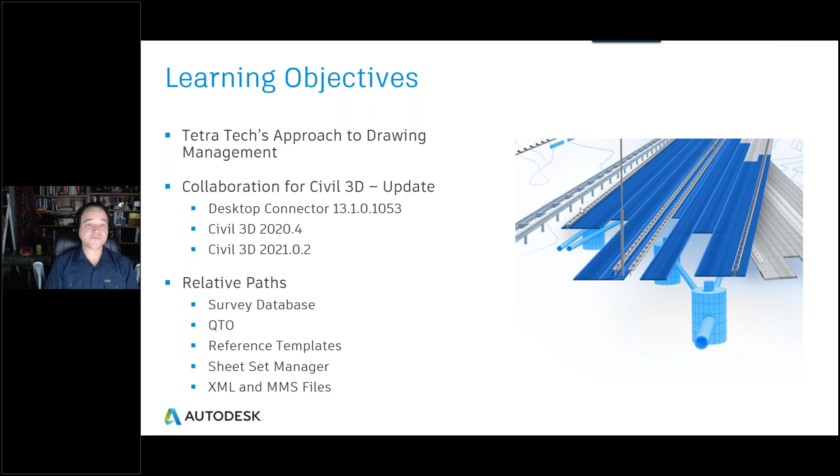What Brian's going to go into detail on are some of the workflow challenges we still currently have in BIM 360, related to relative paths. The components inside Civil 3D that are impacted are your survey database, your QTO quantity takeoff tools, reference templates, sheet set manager, and externally referenced files for surfaces such as XML and MMS files.

I'll let you go ahead, Brian, and talk about your workflow. Thank you, Sean. With our workflow, we were trying to figure out a good way to migrate existing projects going forward into BIM 360.

The first thing I wanted to talk about is the 256 character cap limit. What we've got here is a project under project folders with some basic folder structures, and we're trying to keep them as small as possible because of that 256 cap.

So the first thing we did was upload all of our files up into the server, and from there we wanted to mimic the original folder structure as much as we could, but we did it through the drag and drop method using File Explorer. If we go to the next slide.

By using File Explorer, as you can see here, we navigated to BIM 360, which is going to be under This PC. We started drilling down, and from here it looks like it's on our hard drive. And in a sense, it is.

So what you're going to do is dive down into it, and that actually refreshes your computer, and your computer now sees it, because you're going to be using a batch file. For those who don't remember what a batch file is, it's an old DOS programming method that uses a substitute command where you can make folders on your hard drive look like a lettered path. So what you're seeing here is that batch file.

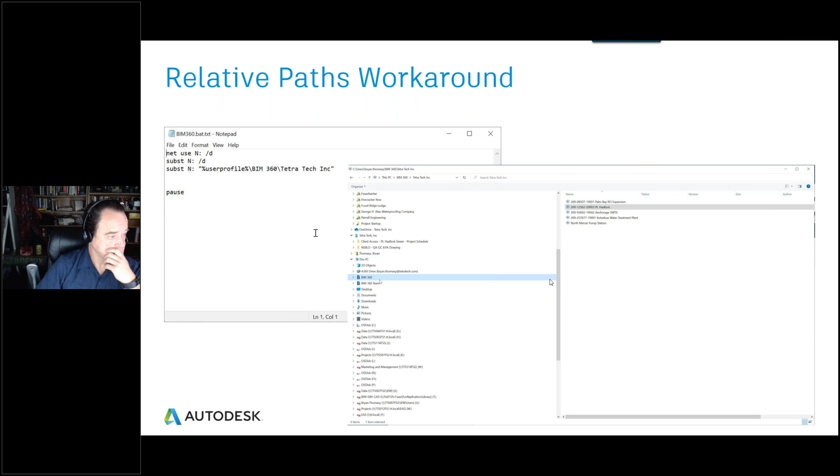On the BIM 360 folder you're wanting to utilize, in this case I've got Port Hadlock, you dive down into the folder structure where your files are located, right-click on them, and sync them for 2021. If you're on 2020, it's basically download. What it'll do is take them off the cloud and bring them down to your hard drive. This is important for the batch file to work properly, because if you haven't done that first, the batch file won't work right and won't see all the folders. So they've got to be cached locally to your hard drive first.

Once you've done that, you keep going forward a couple more segments, then you can launch your reference manager. You can navigate, and you see here my N drive, now it's calling it the operating OS disk N, and now I can dig down in and see the files. That includes Excel spreadsheets, DST files, drawing files, whatever is located in BIM 360 is now located here as well.

This is where I can open up my reference manager, drag the files over, and start setting them to the relative path. You'll notice that in the GBS 22 by 34 horizontal, our title block, it's already set to a relative path of the dot, but before it was basically set to the N drive. So you reset these guys to your relative paths, then just save the changes. You can actually watch it work in the background with your desktop connector as it's updating BIM 360.

Now, I do want to say, when you bring in the drawing, if you've ever used Reference Manager before, it's going to ask you two questions: do you only want to do the first level, or do you want to go down into the nested XREFs?

Only do the first level, it just saves you time. Also try to work backwards - work with your model files first, then work with your files that you XREF into the sheets. Those were the ones you want to work. And don't do them a ton at a time, just do them in batches.

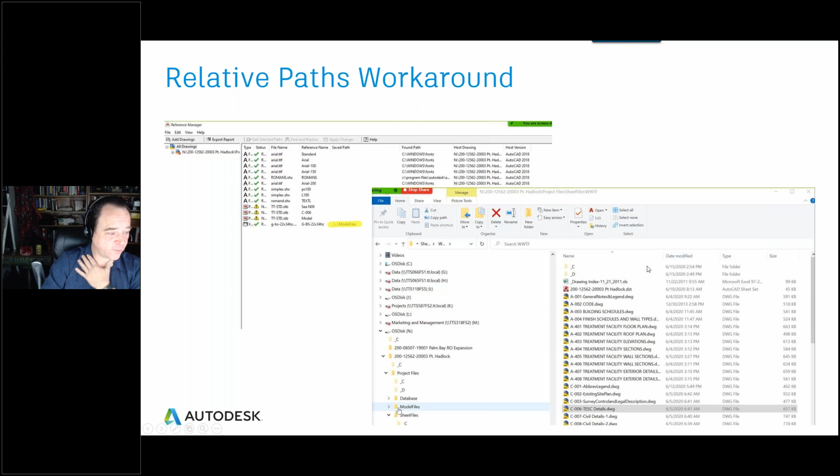So that's basically it. And sorry, Brian, we talked about this being probably one of the most important things. Yep, that is the most important thing. Thank you for reminding me.

Patience, patience, patience. Remember, you are downloading and uploading a lot of data, so just be patient with it. Some of them may take longer than others, but make sure you're in a position where you can set aside a little bit of time and do this.

Pre-cache, then change, and be patient. Have the desktop application open so you can see what's pending and what's moving forward through it. Once you do this - I took a 256-page plan set with over 500 files.

Through everything, it took me 36 hours, but that's after doing it four times. By the time I got it down, it took 6 to 8 hours, and the whole thing's readjusted, and now it's COVID-19 proof - we can all work from home, and it's a beautiful, beautiful thing. So patience.

Thank you, that's about all Brian. I have. Mm-hmm. That was absolutely awesome. We really appreciate that. My pleasure. Anytime. Excellent - does anyone have any questions for Brian?

Okay, we have one question coming in. The mail link does not open in one system. What do we do?

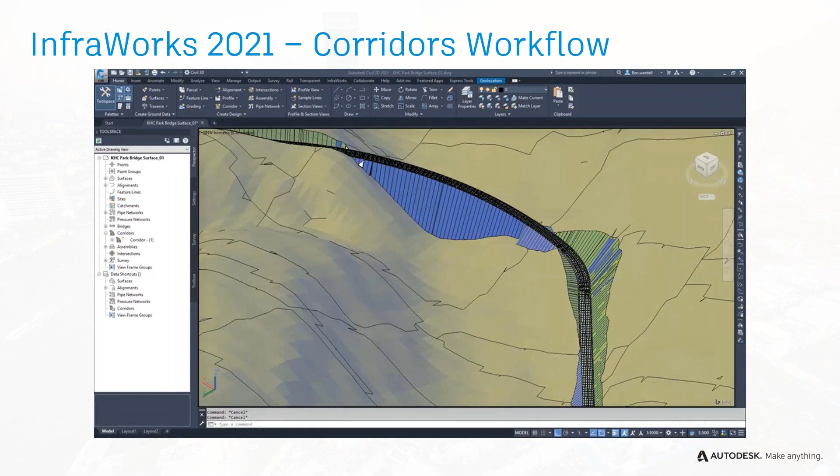Let me dive right into that. InfraWorks 2021 now utilizes the power and precision of Civil 3D for corridor models. Once the user has developed the geometric design details and created the corridor model, they can import their corridor directly into InfraWorks. Here you see the Civil 3D drawing—when I go into InfraWorks, I can import them directly.

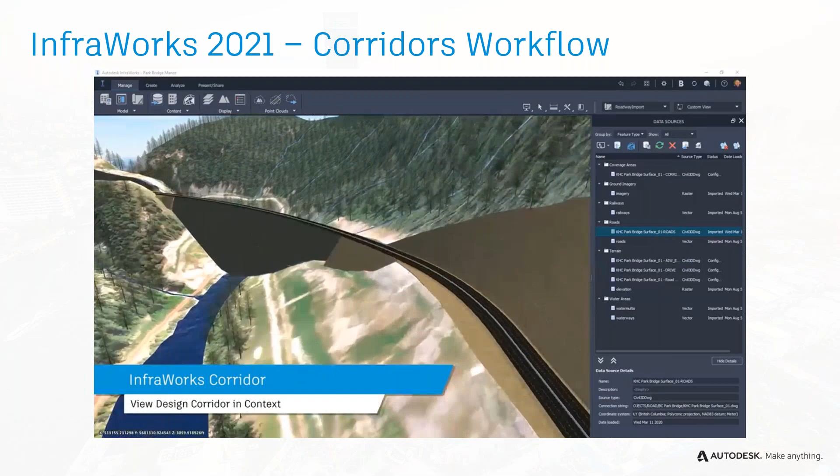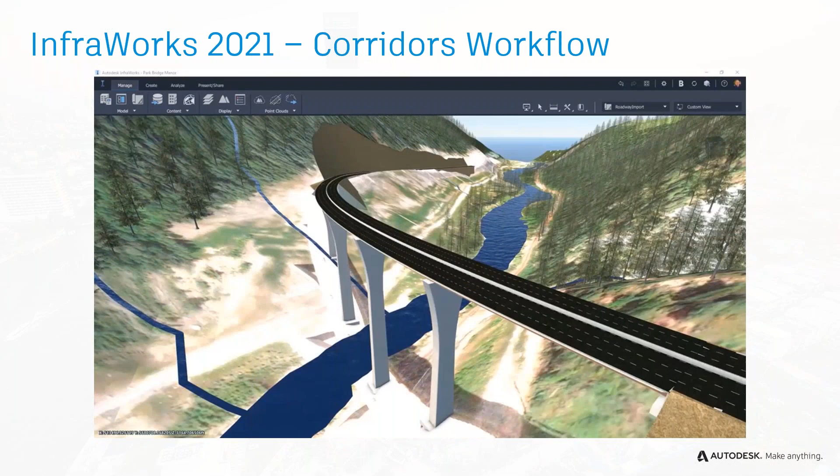When you do that, there are options that give the user control over how they import alignments with corridors from Civil 3D. This improvement allows users to import all the calculated design elements or just the selected elements—you can pick what you want. Users can even define the mapping of materials to apply to the corridor shapes, everything. Once you do that, the fully designed roadway corridor is placed in the contextual environment. From there, you can build your bridge workflow, tunnel workflow, anything using the detailed design geometry. The corridor model in InfraWorks is read-only, but it's linked to Civil 3D in a connected workflow.

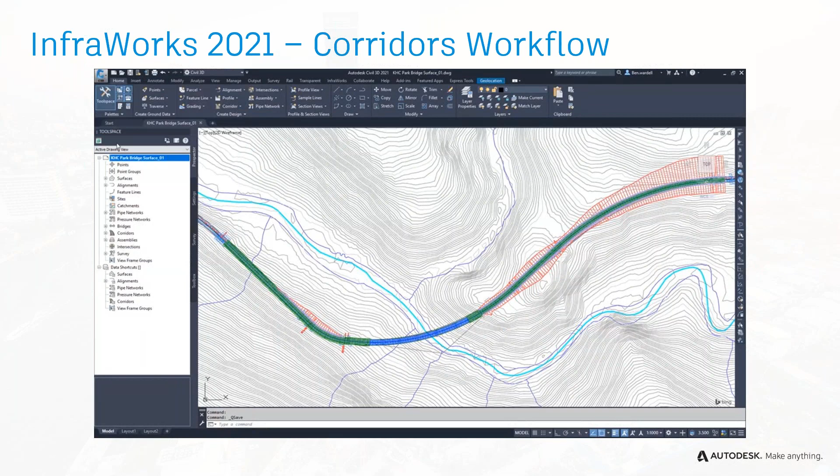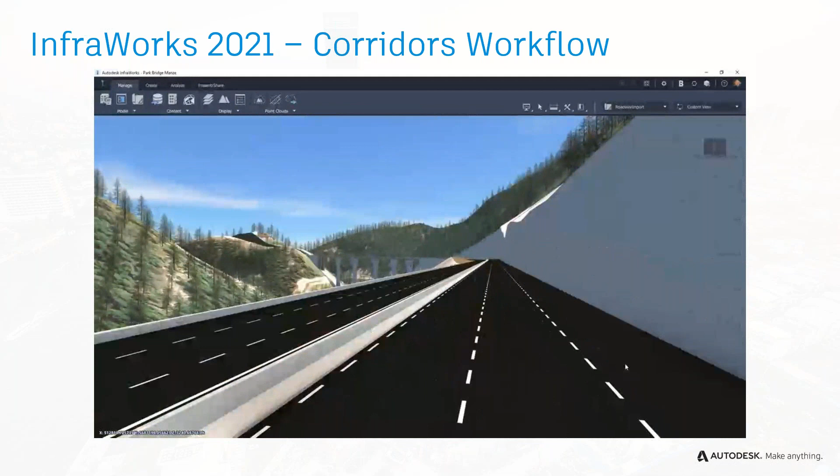So let's say revisions are made to the corridor model, either you change the alignment, the profile, or assembly-related modifications. Users can simply rebuild the corridor, save the changes, and easily update those changes in the connected InfraWorks model. All you have to do is click the data source and choose the re-import option. It's kind of like a cool refresh, but works on the DWG file and gets the detailed design aspect. This capability gives good control and helps enhance the workflow connection between Civil 3D and the corridors.

This feature is available from 2021. We are making some modifications that will come up in a future release also, but this is currently available for users to use. And the civil structures workflow is kind of a continuation of that.

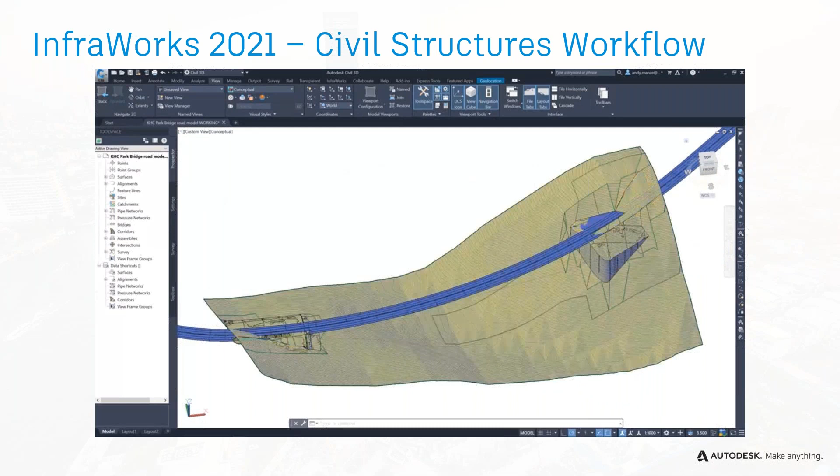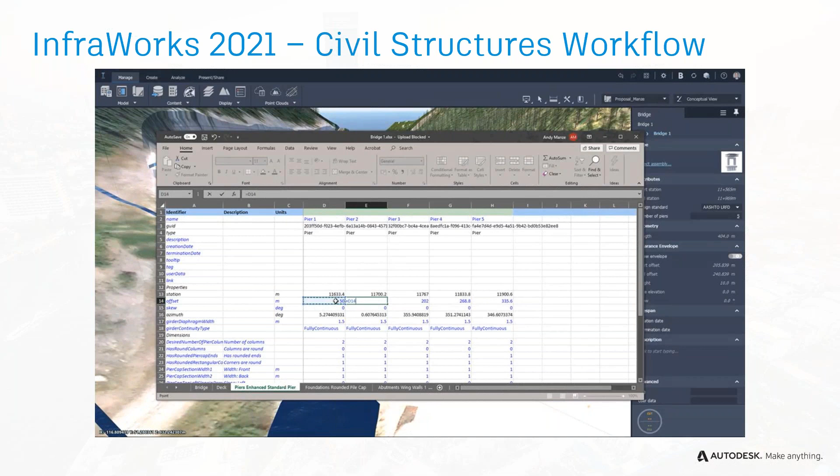In 2021, Autodesk released the enhanced bridge design workflow for bridge professionals. We start in Civil 3D, utilizing the road geometry to create the initial bridge. Then InfraWorks creates the bridge along the alignment using built-in heuristic rules. We can then interact directly with the bridge structure, changing individual components using the parametric toolset, for repetitive tasks or where geometry may depend on a formula.

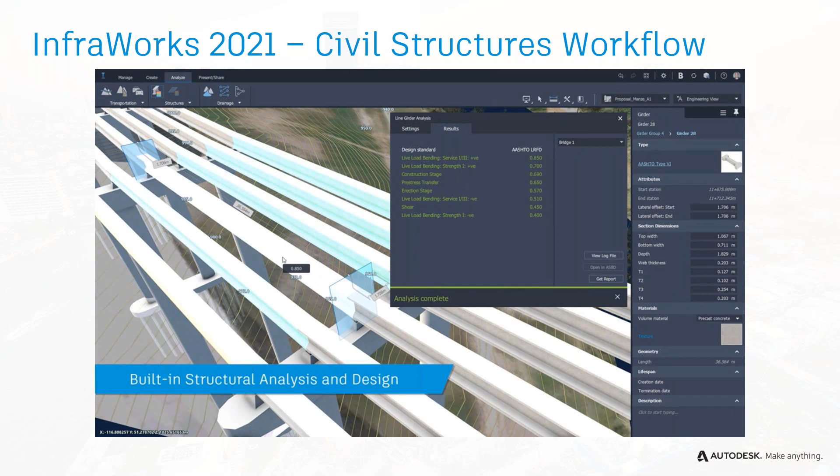You can even use a spreadsheet, which can be generated, edited, and used to update the model, making it more flexible and fluent. During the optioneering phase, it's possible to utilize the integrated analysis and design tools. This provides feedback to the user to identify workable solutions in an easy-to-understand format, and it also has detailed calculations and everything.

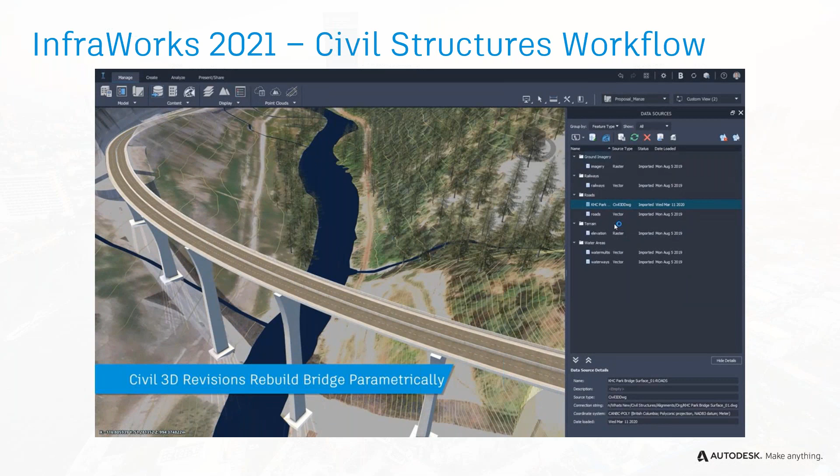When changes are made in Civil 3D, same as before, these can be accommodated by refreshing the Civil 3D data source within InfraWorks. The bridge structure will in turn automatically rebuild parametrically.

The bridge structure can be published to Revit also at any time with a new transfer process, giving additional flexibility in the use of customized Revit templates. Category mapping is a cool feature, providing reports based on mapped category bridge parts. So you can see how detailed it can go with inter-product communication.

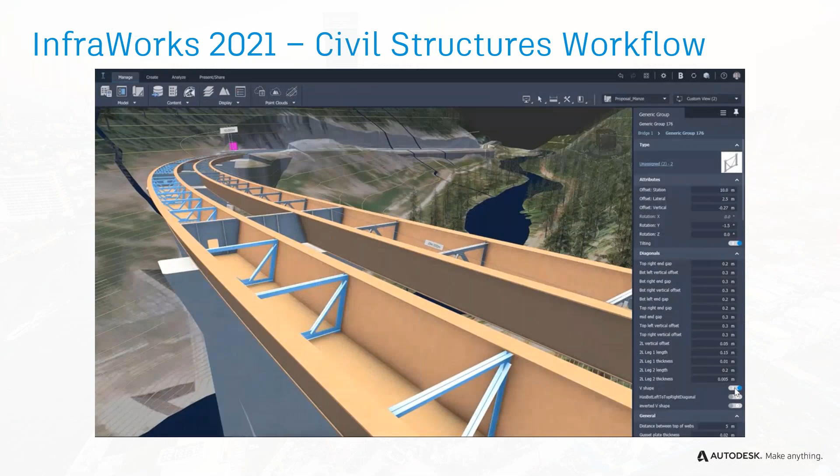Work in Revit can continue concurrently with the bridge modeling in InfraWorks, carrying out detailed tasks such as rebar, detailing, and sheet sets, everything. And it's also now possible to bring the bridge model back into Civil 3D to assist with the grading.

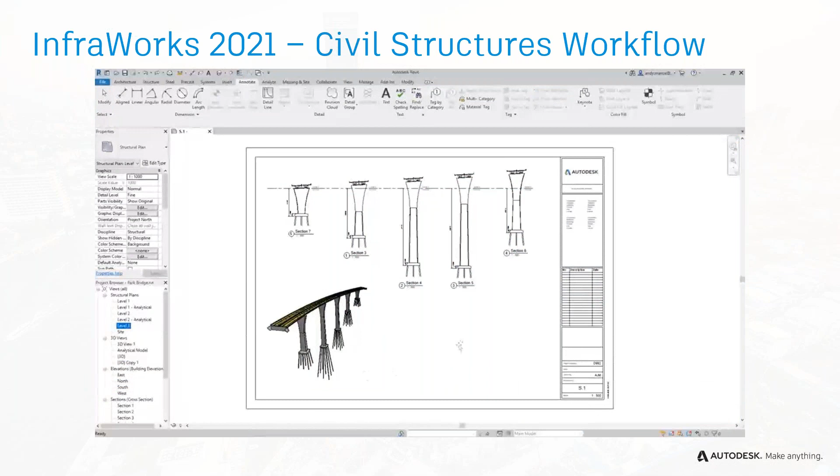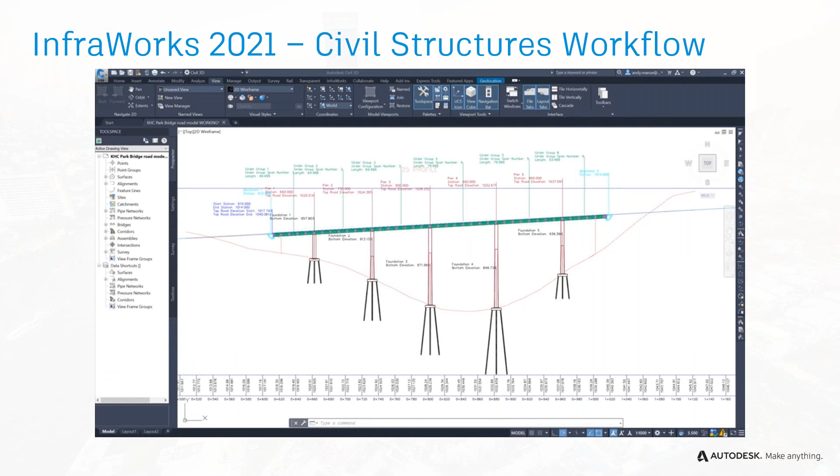I'll wait here—you're talking about the sheets and the Revit piece of it. And once you have it, you can bring it into Civil 3D to assist the grading task and create further documentation needed. And when changes are made to the bridge model, it's really cool—they can be reflected in Civil 3D by refreshing the data set.

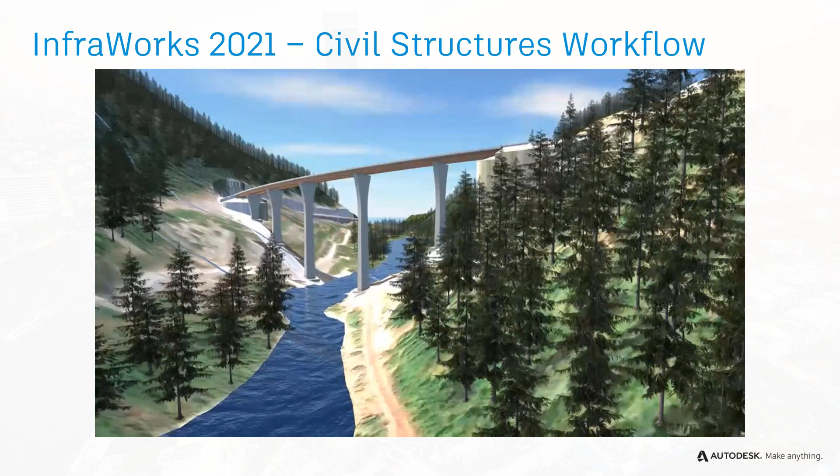This newly released enhanced bridge design workflow provides a means for bridge professionals to rapidly develop multiple design options through the use of really powerful parametric modeling technology. We've had this parametric model a little bit before, and we are enhancing it with additional parametric content and workflow interop between Civil 3D and Revit. The data flow makes this workflow much smoother—a very simple, sleek workflow for practical applications.

So those are the two main things that took the main stage in InfraWorks 2021. The other one is DPI scaling. Now all workstations have high-definition monitors and screens. Previously, this is a before-screenshot of InfraWorks—you see that InfraWorks tries to show a lot of content, but the fonts and text become too small, and sometimes it's hard for the user to read through.

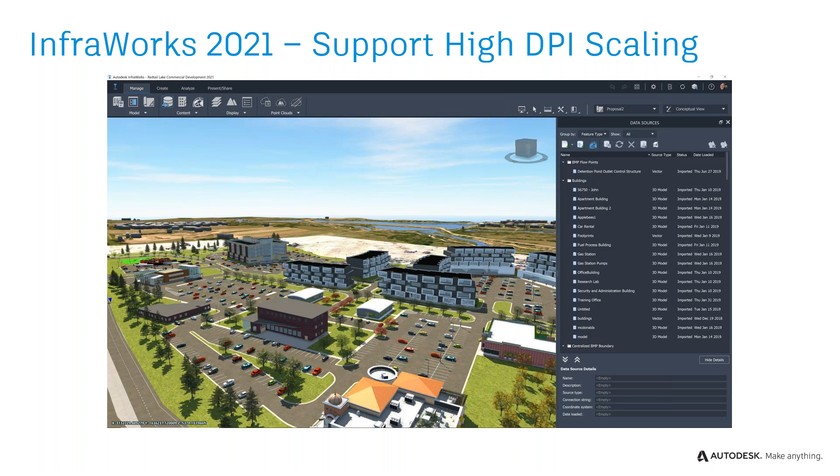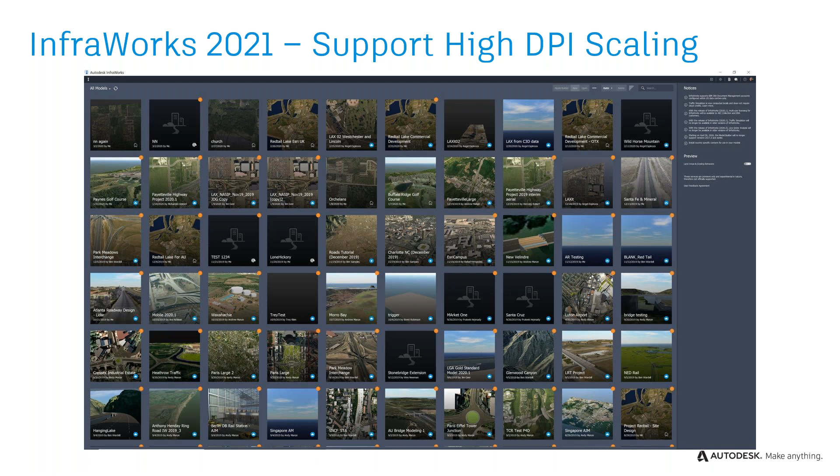So we updated that part so that now you can actually change it. In the newer version, the software automatically adjusts so the screen still provides a lot of data content, but your fonts are not too small—you can actually read it through very easily. Same way, on the typical home screen with options in a smaller font, with DPI scaling it's now much easier to interact and work with, especially on high-definition monitors. That's where this matters a lot.

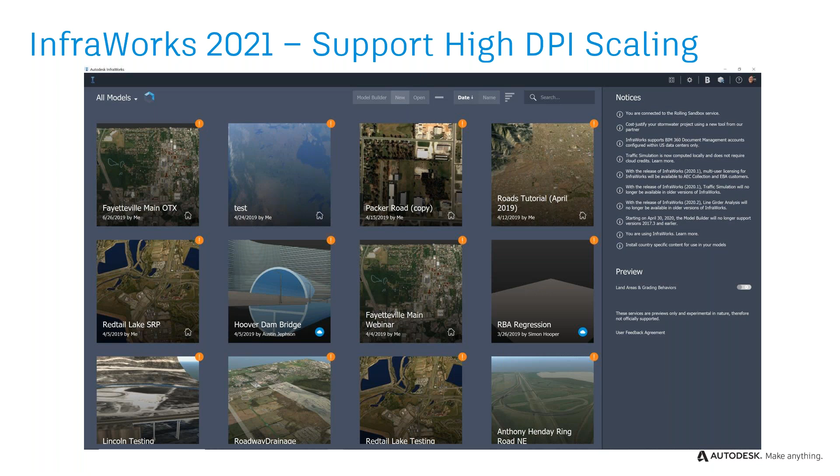So those are some of the few new things we added in InfraWorks 2021. There's a lot more available too. For example, you can always check more details on the corridor geometry Civil 3D piece—this unified DWG and IMX import. This is another cool thing. For those who work between Civil 3D and InfraWorks, there are a couple of ways you can bring it in: IMX and DWG.

Sometimes the UX and workflow might look a little bit different, but we made sure it's unified and straightforward for the user to take the data back and forth. And for parametric bridge content, we added more content, especially from Inventor—that's why it's parametric content. So now it's not just one fixed model; you can update it based on your practical needs.

I think that's what I wanted to cover, Michelle, today.